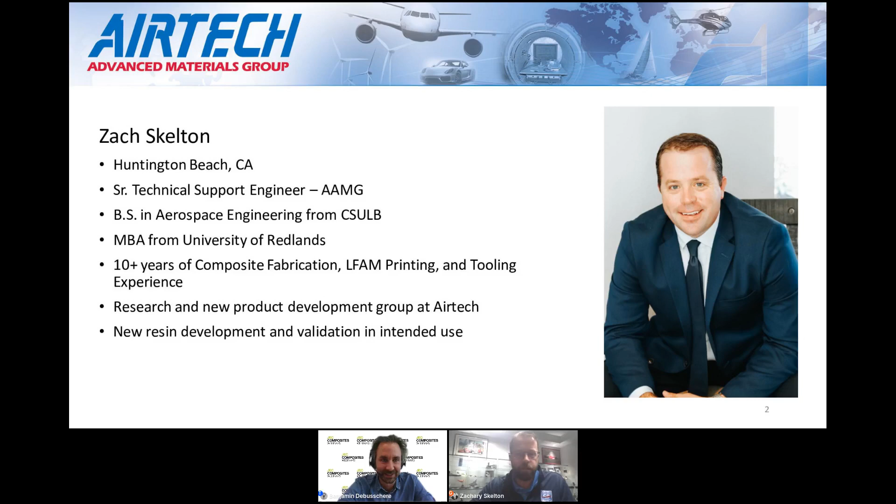You can go, Zach. It still shows loading on my screen here. Can we see the presentation? You don't see it? No, not yet. Let me reshare it. There we go, okay, perfect.

As Benjamin noted, we are going to be talking about how Airtech is validating our tooling materials for specific applications.

Just a little overview. Benjamin already gave a great overview of Airtech, but we wanted to specifically talk about our large format resin development, the steps we take along the way from compounding, printing, mechanical screening, as well as multi-platform validation and working with OEMs for end-use applications. We'll also take some time to talk about the elimination of barriers to production use, the functional testing we're performing, use cases and success stories, and a bit of the ongoing development and projects we're working on at the moment.

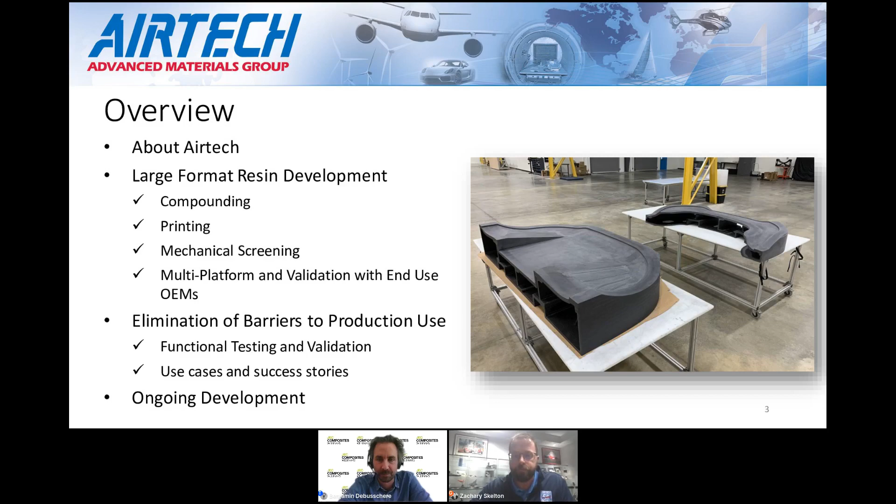A little bit about Airtech, really just leveraging our experience. Most of the folks at Airtech came from production environments, composite fabrication history, as well as a lot of historical tooling applications. Leveraging over 50 or nearly 50 years of compounding and extrusion experience, and really just taking 3D printing, which is essentially an extruder up on a gantry, we're leveraging that experience, as well as selecting material specifically knowing the end application.

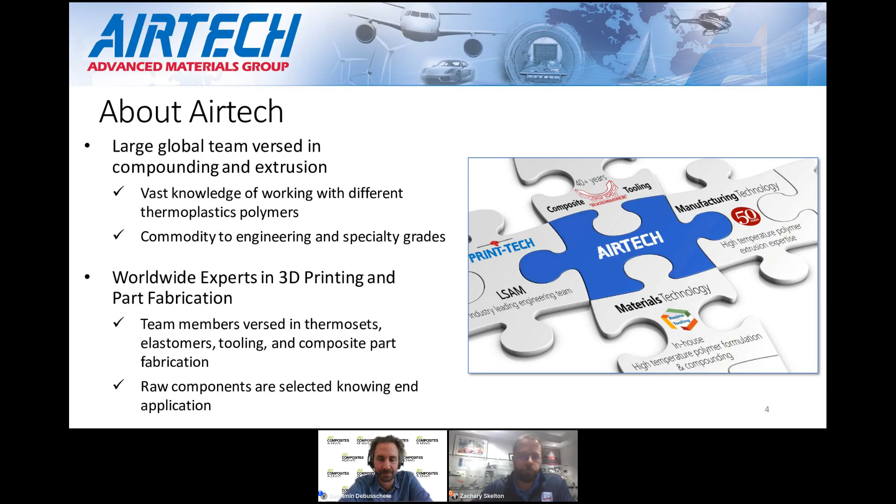So we do have two locations, one in Luxembourg, which is close to probably most of the folks on this call, but also in Springfield, Tennessee, which is just outside of Nashville. Identical machines, identical footprint, identical team members and capabilities.

So in both locations, we have two Thermwood LSAMs, which are 40 feet by 10 feet by 5 feet build envelopes. Both gantries can cover the complete envelope of the machine. So high deposition rates, we can extrude up to 500 pounds an hour. Tools get built extremely quickly, but then post-printing, we can come back and machine to aerospace levels of finish and quality.

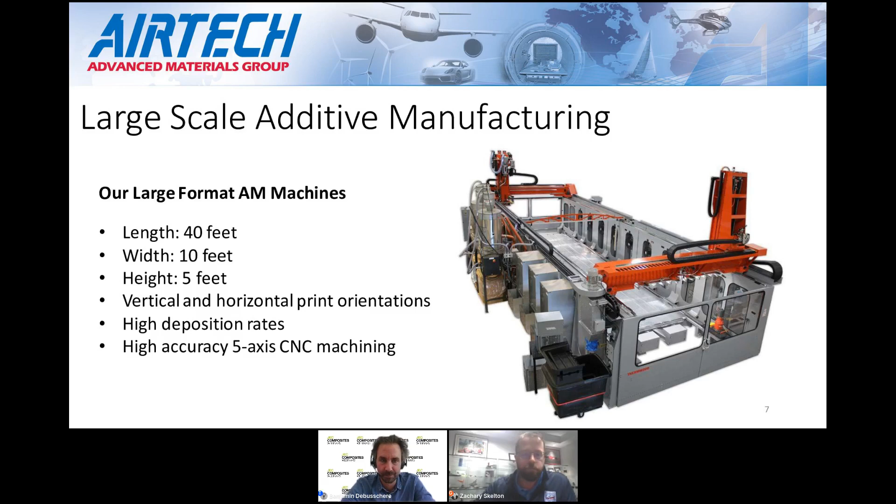Just a brief overview of the steps we go through while validating tools or materials for tooling applications. Everything starts with compounding, and then we'll move on to print trials. Post-print trials, we'll perform some mechanical screening, tweak things if needed, but then start scaling things up, look at in-depth lab analysis, as well as printing articles for the intended use. And then we'll start working with other machine manufacturers, validating the materials work on their machines, and continuing to work with customers through fabrication.

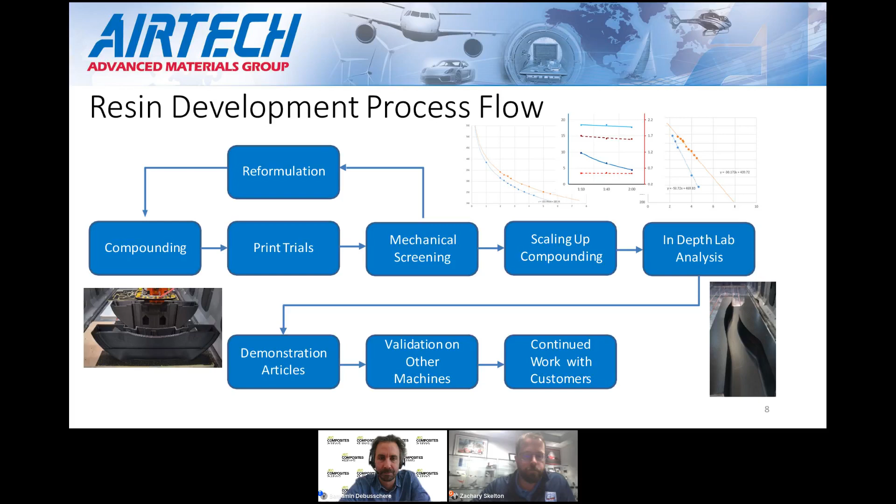So compounding is kind of where it all starts, right? As I mentioned, Airtech's been compounding and extruding now for 50 years and over 40 years of experience with various other different tooling materials and applications. So really raw materials are selected knowing the intended use. And the goal is to develop resins that are capable of meeting the expectations and really just drive the technology forward, right? We want to make sure that the materials can keep pace with the development of the industry as a whole, and push things forward.

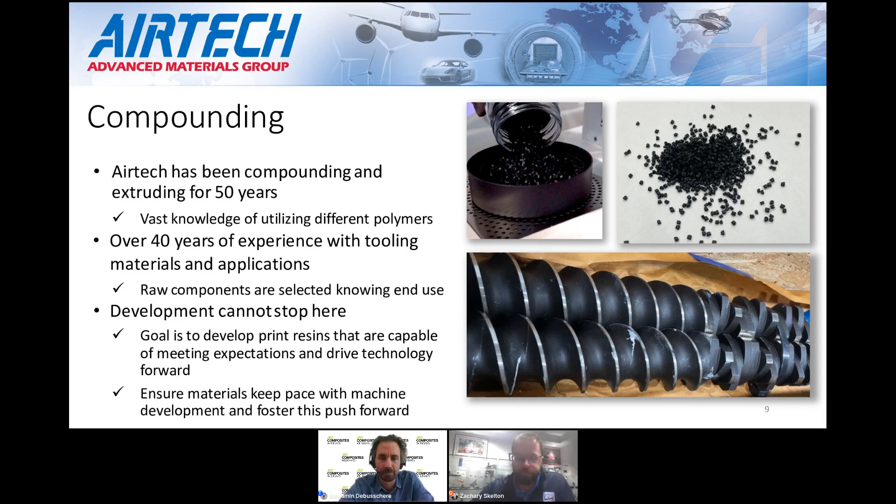So after compounding, we come to print trials. We're going to really just leverage the knowledge of what makes things printable, but evaluate everything through the process. So looking at essentially layer times, looking at the thermal properties, warp, start stops, how those are tuned and tweaked, make sure that it's really meeting our expectations, but also looking at things like step over, printing at angles, bridging, those kinds of things, but really ensure that we are meeting the expectations for the intended use.

To date, we have printed and characterized over 350 different resin formulations, and frankly, we're not sitting on our hands either. There's probably another 50 to 70 that are in the pipeline here.

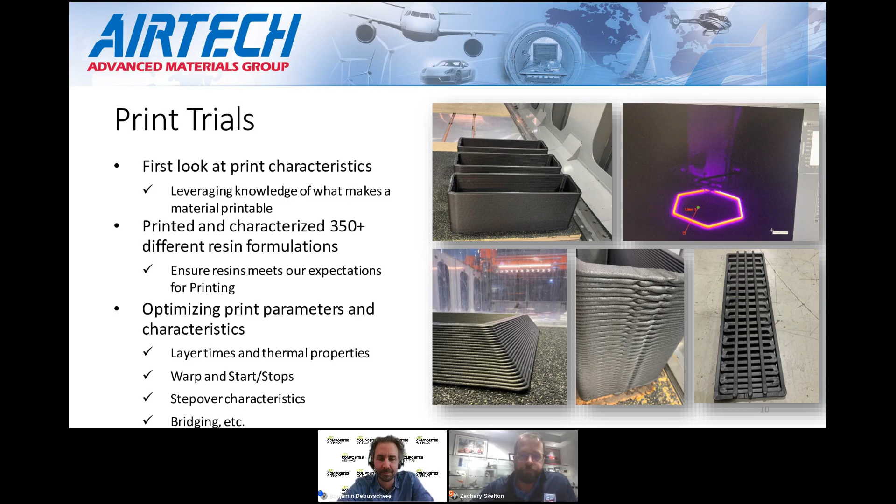So post-print trials, we'll look at mechanical screening. Really everything is done with the intent of as printed, right? So you can see several of the coupons there. But this is not injection molding. In reality, the injection molding properties really don't do anybody any favors. We're going to start looking at things like tensile strength and modulus, elongation at break, flexural strength modulus, CTE, as well as glass transition temperature. Again, just making sure that it is meeting the expectations.

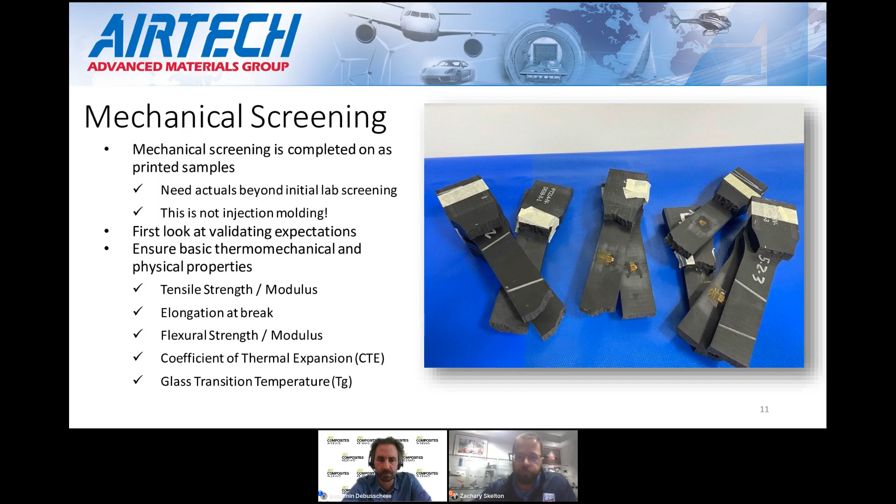Post-initial screening, we'll start looking at larger batches. Obviously, we want to make sure that things are scalable, but then we'll also start producing material enough for a complete mechanical analysis, as well as printing demonstration articles and testing them in the intended use.

So in general, a lot of the compounding will happen here in Huntington Beach. It then gets transferred to Tennessee, where I work very closely with the team members there. Tools get printed, they come back to Huntington Beach. We have ovens, autoclaves, all the bagging materials that we would need, and we'll start validating them in use.

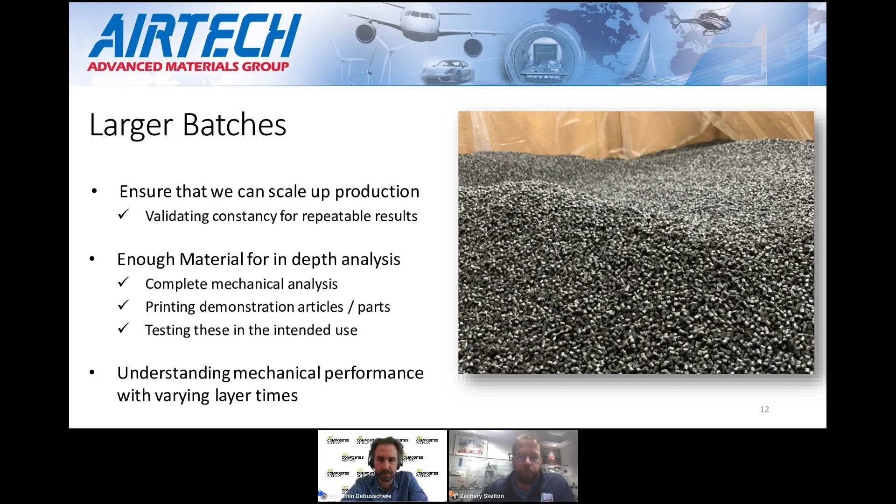So post the scaling up of compounding, we'll start looking at a more in-depth analysis, right? This is all third-party testing. It's all data that's available for spec qualification with our customers. But we're looking at all failure modes, and the idea at this point is really to understand the mechanical properties as a function of time.

So with 3D printing, there's kind of this Goldilocks zone where things are not too hot, where they can still remain stable, but then you also want to deposit material back in a timely fashion so that you get good mechanical properties. So really the drive here is to enable stress analysis as a function of layer time. We can take the slice geometry, look at what the deposition time is going to be, and perform a stress analysis prior to printing.

But in conjunction to that, we'll also start doing contact material testing. We have an extensive database of materials that we've validated to date. That includes solvents and cleaners, sealer and release agents, as well as production and tooling resin systems. You can see just a little sample of it there. In general, good, bad, and ugly, we're happy to test it. Sometimes you get surprised. There's a broad database that is living and growing every day as we work with customers. And frankly, if we haven't tried it, we're happy to try it. We have plenty of flat panels here in Huntington Beach or in Luxembourg, as well as in the UK. Autoclaves are available, so happy to test any resin systems if we haven't.

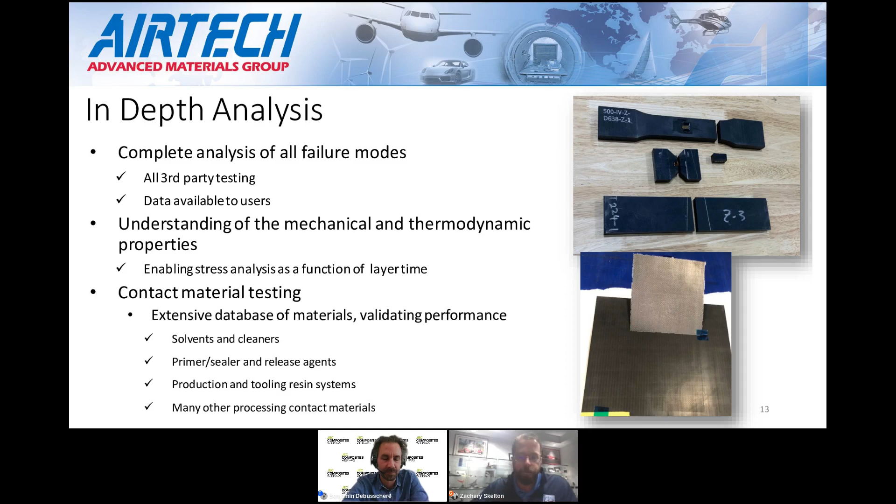Also look at printing demonstration articles, as well as the actual cycle test tool - we'll cover more of that in a minute. In general, no secondary surface coatings are needed. The tools get printed, machined, and then are vacuum tight and autoclave capable. All of our materials are post machining. We've also done extensive work with annealing trials and validation, looking at long-term use of the tools in a production type environment - long-term autoclave cycling, dimensional analysis, vacuum integrity, as well as fabricating parts off of the mold in conjunction with that cycle testing.

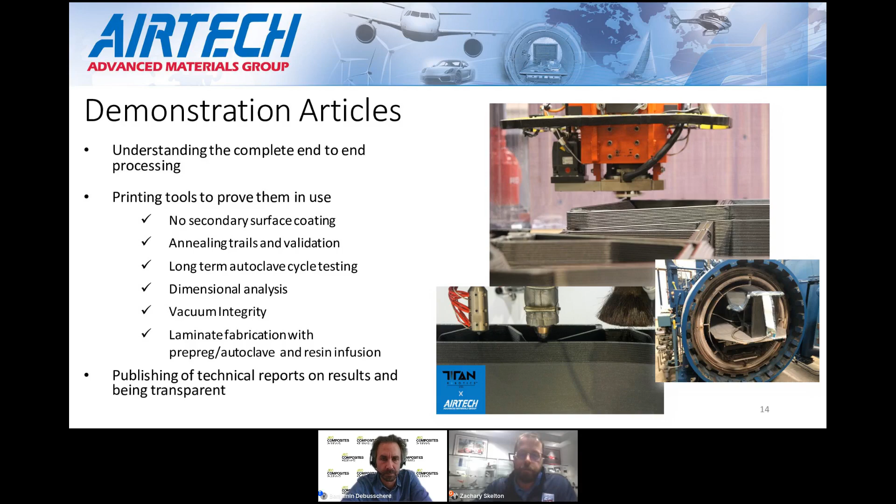As I said, we're working with all machine manufacturers, and I'll cover that more as we go through - but at least these are the folks I can be transparent about. We're working with a lot of machine manufacturers that are in development. The intent in working with other machine manufacturers is validating that our expectations can be met on their machine, showing that the mechanical data we publish can be achieved there as well. We'll also help with extrusion, validating the mechanics, third party, and being transparent about those results.

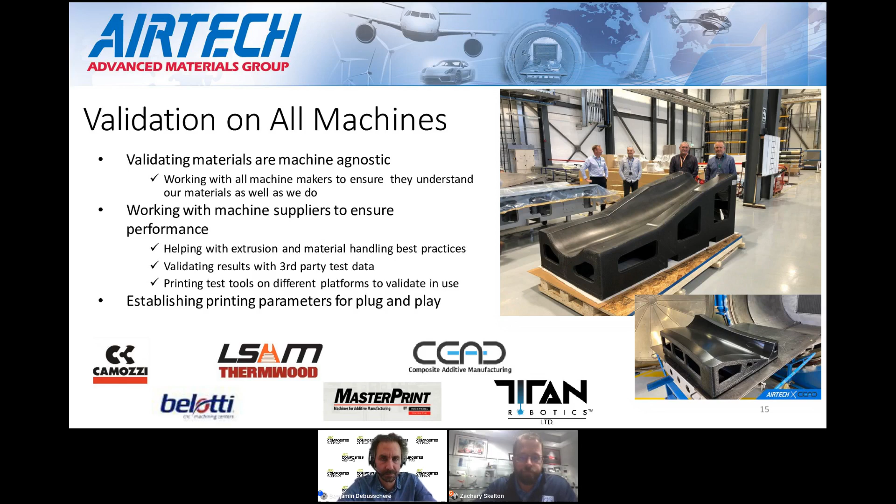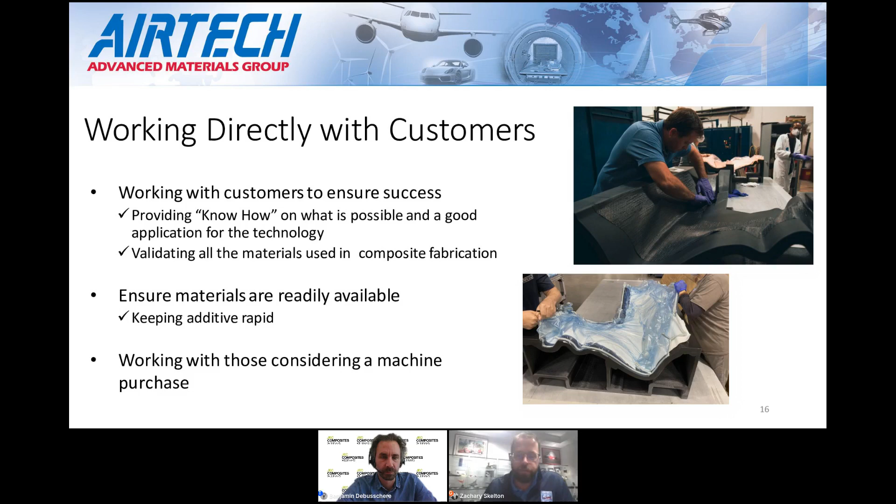We'll also look at printing test tools - you can see an example of a tool made on one of the CEAD platforms, as well as the Master Print system from Ingersoll. We'll also work directly with customers, even using the tools, everything from the bagging materials, the sealant tape, those kinds of things. We also keep an ample inventory of materials, both in the US and in Europe - the idea is keeping additive rapid. We're happy to work with those considering a machine purchase all through the process. Frankly, we want everybody to buy a 3D printing machine.

A little bit about the barriers we're working to overcome in the production process - what are those? Lack of mechanical data on current materials. It's quite common to see materials that are made but not tested and validated. We want to prove those in use, show some history, and help customers understand how to overcome some of the anisotropic properties of the materials. There are also misconceptions about material toughness, what accuracy can be achieved, as well as showing we can meet the thermal requirements for spec use.

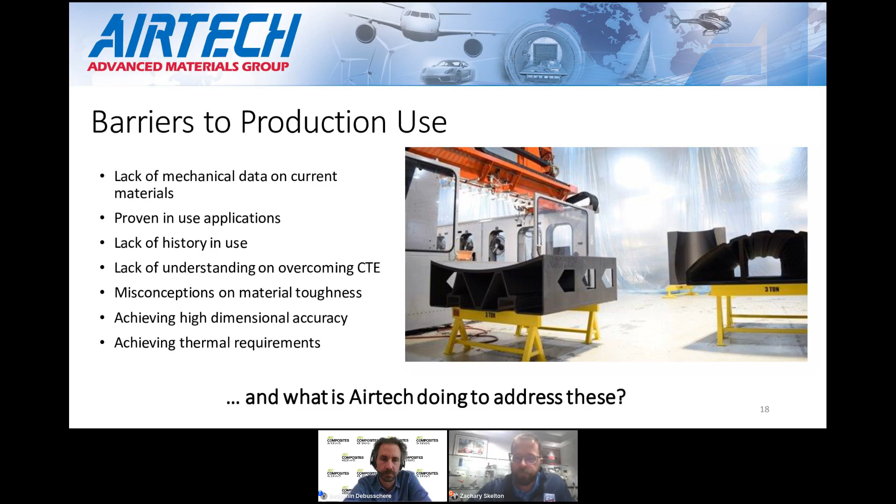It all starts with the mechanical and functional testing. This is not injection molding - we really need properties that are as-printed. Why is that needed? Larger tools, the bigger you get, especially things that start going overhead, we really need to perform a stress analysis, making sure the tools being produced are safe for the end-use customers. And then third-party test analysis, making that data available for qualification.

We've done a significant amount of work with the national labs here in the US, as well as in Europe, validating the as-printed performance - making sure our materials are machine agnostic, that we can work on any print platform. Then understanding how those Z mechanics change as a function of layer time. Typically the bead stacking will drop off as you push the layer times longer and longer, while the X values remain fairly consistent. As you print larger and larger, sometimes you don't have a choice, and you need to understand if the tool will meet the intended use as we push that layer time longer.

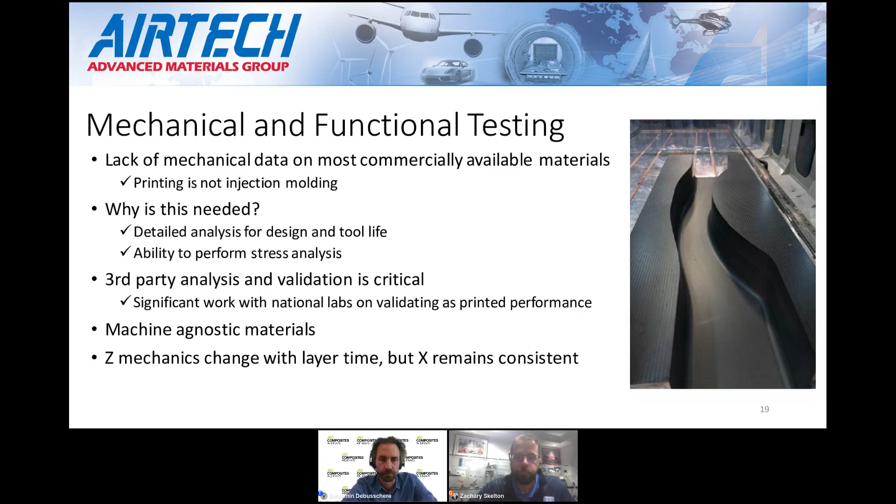So again, proving them out in use - you can see the cycle test tool that's there. We are past 350 autoclave cycles now, not seeing any signs of failure, and again no secondary sealing is needed for that vacuum integrity. We do expect it to go past 500 cycles. We're continuing to cycle that and pull laminates, and then publish those results.

We can also achieve a very nice surface finish, depending on requirements - these are all done prior to any seal and release application. You can see a 16 micro-inch finish there, very close to a Class A automotive surface. We've continued to run additional trials with polishing to see how good of a surface we can achieve, but Class A surfaces are achievable for automotive applications.

Zach, I have a quick question on this specific slide - what about the hardness of this material? How do they compare to pre-preg or metallic tooling?

There's a common misconception in the industry that thermoplastics are soft and not rigid. In reality, we're getting very close to the hardness of aluminum, especially as we move up into the higher temp polymers, similar to thermoplastics used in aerospace part applications. But the resin matrix itself is much harder than, say, a traditional thermoset. So the tools are much more robust than most people give them credit for.

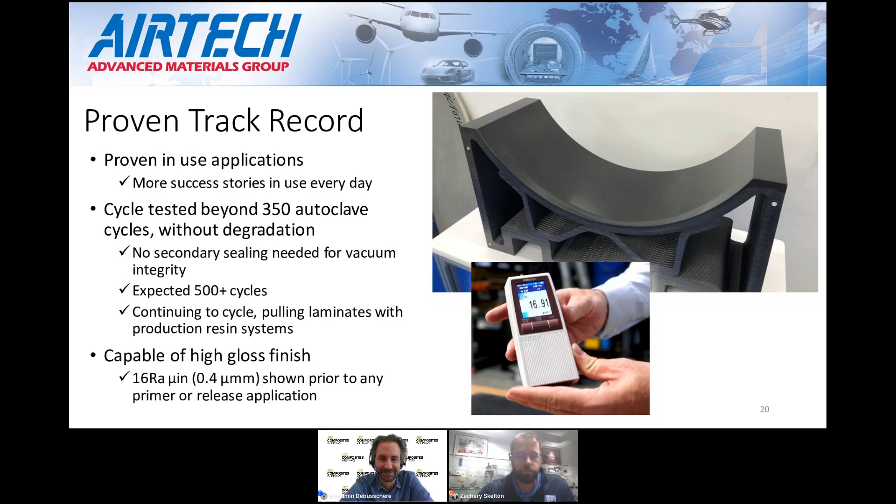This was off of the cycle test tool, post 250 cycles. We are still evaluating it at 350. I can tell you right now the data is identical, but this is just the data post 250.

This is the raw autoclave data, 100 PSI, 355F, so 180C and 7 bar. You can see the raw autoclave data — vacuum probe 1 dropped about 0.2 inches of mercury, or about 7 millibar. Vacuum probe 2 fluctuated, we'll call it zero. But again, vacuum is shut off at temperature and pressure.

So very well within any specs for vacuum integrity. But we also performed a fiberglass leak check. For folks not familiar with it, it's kind of the gold standard in tooling for knowing where a leak is. That 0.2 inches of mercury drop, that 7 millibar, if that was in the tool face, would be problematic. But you have potential sources like bagging ears, through bag connections, couplings to hoses, couplings to the autoclave — all of those can leak a little bit. So this helps us understand the tool surface itself is solid.

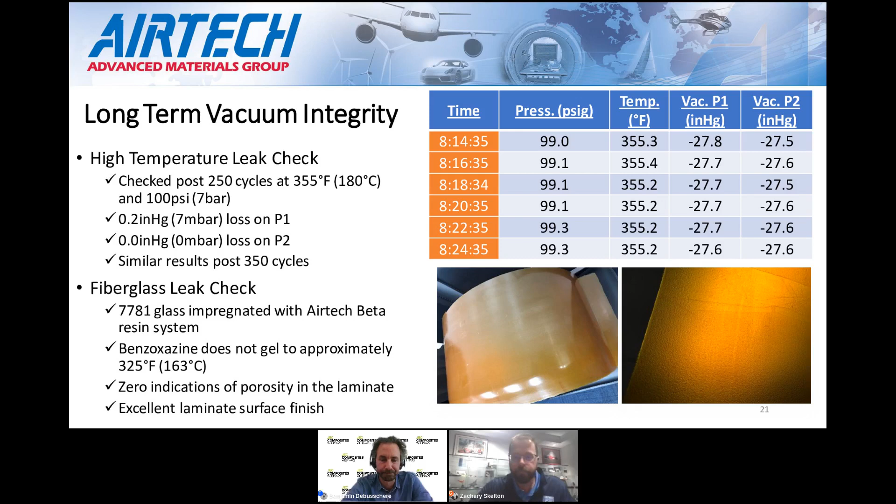Again, looking at the long-term dimensional stability, we do have a very detailed test report that we can provide to customers — feel free to reach out if you'd like to see it. This was an overlay post-cycle testing to the original scan data, showing no surface deviations greater than 0.005 of an inch. You can see the overlay there.

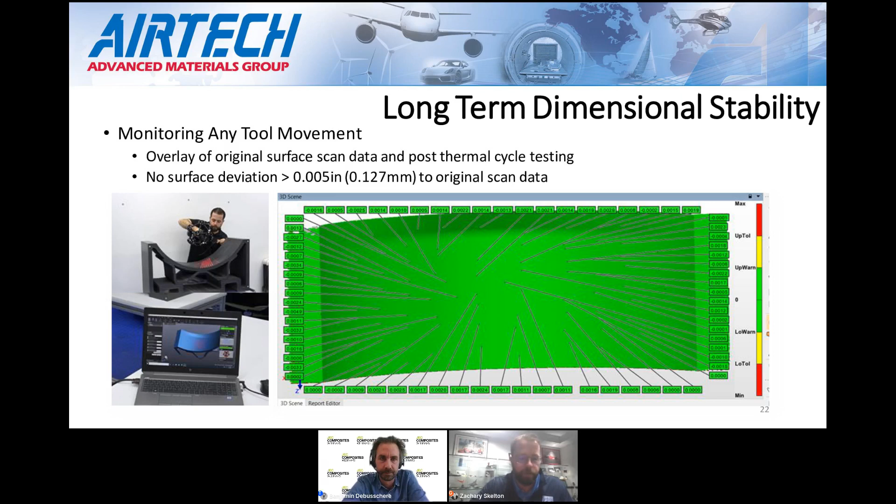Again, looking at that surface integrity — like I said, there are some misconceptions on the material toughness, but we've been pulling laminates from that tool, you can see a couple examples there, benzoxazine and an epoxy down at the bottom. We've tested everything we have in our inventory with no issues, but we've also been pulling production resin systems off of tools just to show they will work. That includes BMIs, epoxies, cyanate esters, in autoclave and out-of-autoclave applications. If we haven't tested it, we're more than happy to go test it. You can see an example of the gloss that can be achieved coming off of the molds.

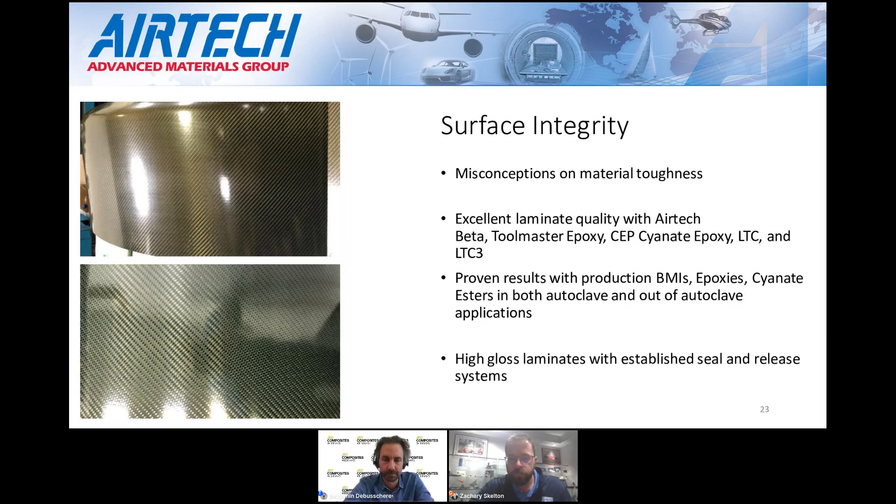Just a visual of the tool after cycle testing — you can see there's really no visible deterioration, damage, or oxidation. We're currently evaluating the 350 cycles at our California and Tennessee locations, again trying to share that information.

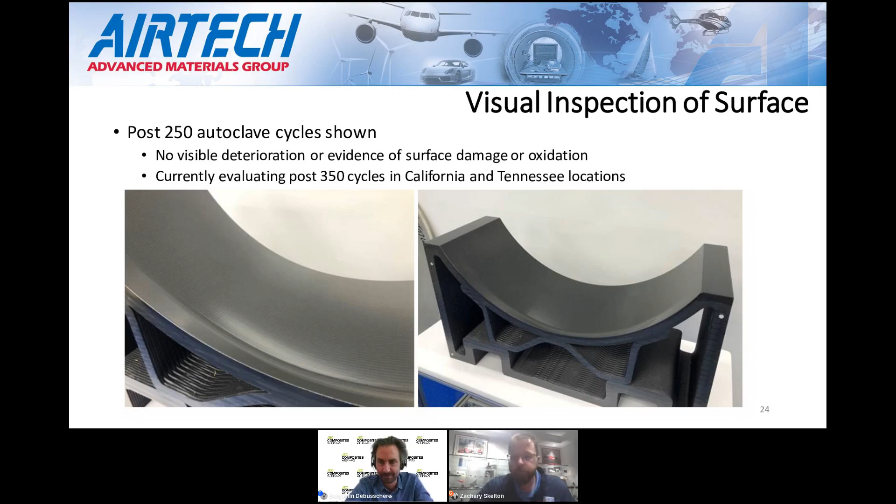Under the microscope, you can see an example of the tool surface. We're not really seeing any evidence of micro cracking or surface degradation. In traditional thermoset systems, the failure mode is typically that micro cracking, which leads to delaminations, and ultimately to loss of vacuum integrity. But here we're really seeing no evidence of it whatsoever.

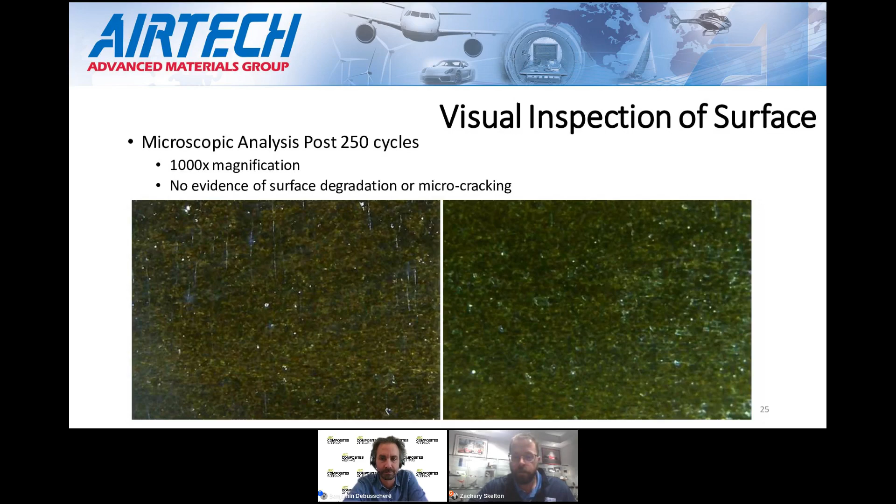Not all things are printable, so understanding where it's a good fit and where it's not - we're more than willing to help customers understand that, work through that. In general, we will take a surface, compensate it based on the orientation it's going to be printed in, and make sure that the tool will be in the right place during cure. And then, frankly, being transparent if things are not a great fit for the application. So it's not a solution for everything, but when it has a place, it's a great solution.

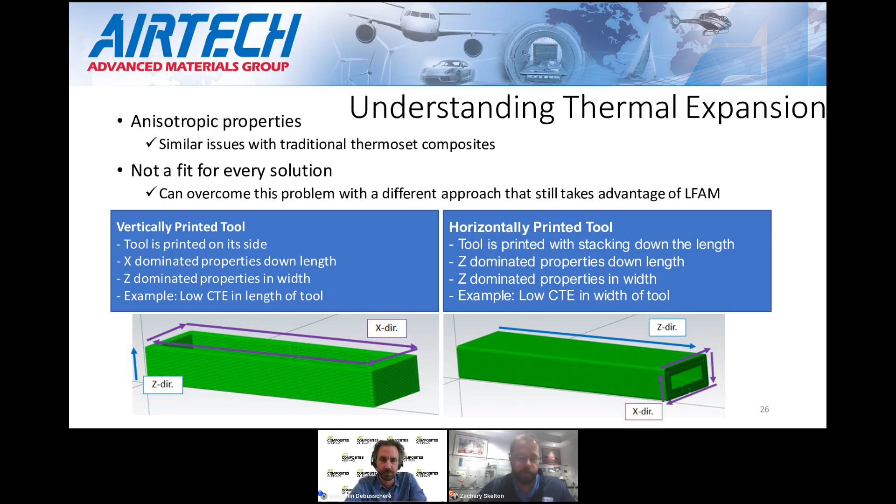We can set details in post machining. We've seen proven results with masters, layup molds, preform tools, holding fixtures - you name it. Even in metal forming applications, we're seeing some great strides.

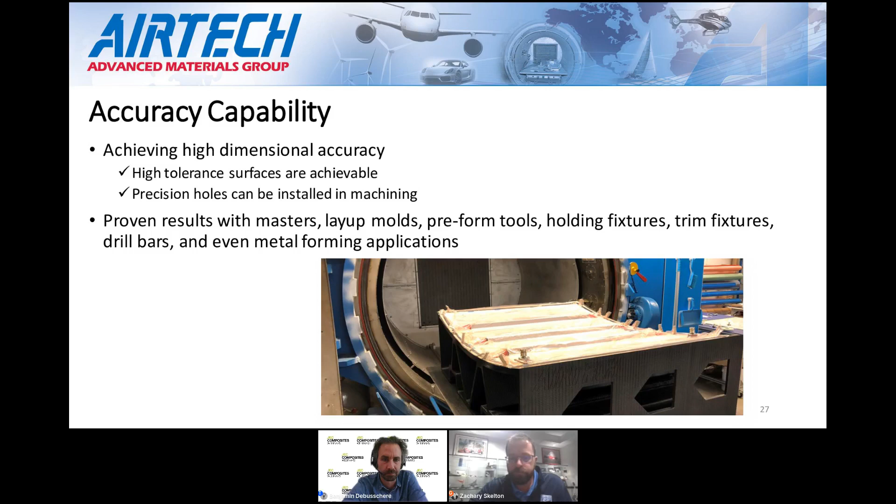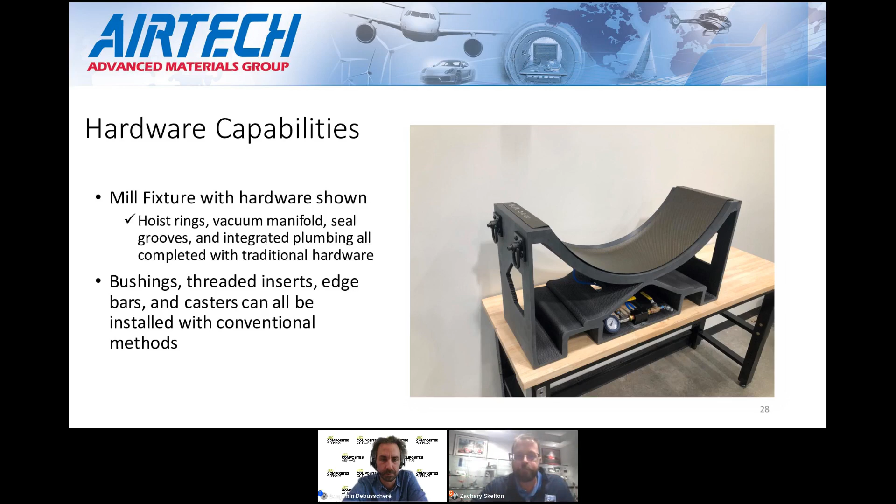Also looking at the consumables - we do have a brochure available of all the materials we've tested, and then our recommended materials to use for the given application. So everything from the low temp applications all the way up to high temp.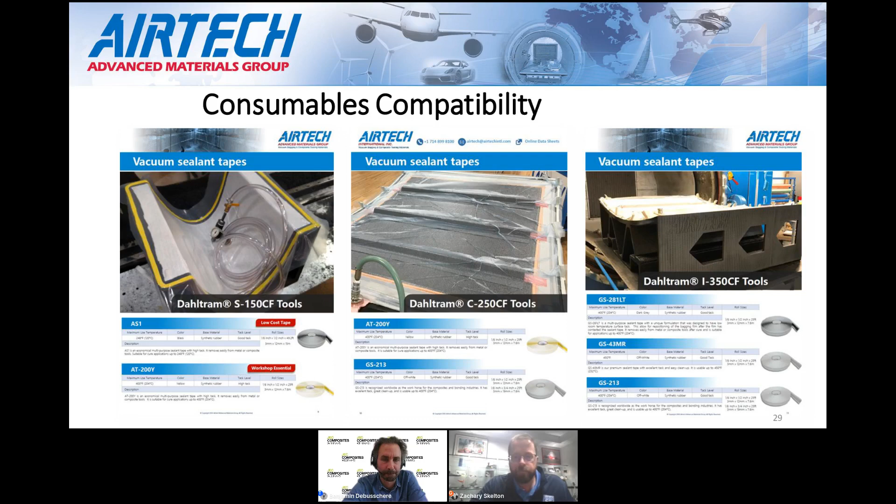We've also done a considerable amount of work on how to design tools to achieve the thermal performance required. In general, the backup structure, everything, is printed in situ with the tool face sheet being printed. So printing in things like large windows and then limiting thermal mass - limiting contact with the face sheet, allowing for good airflow.

Given that it's 3D printing, things that are achievable with traditional processes but really cost prohibitive - we can do things like print in contoured headers or grow a header to only contact where it's needed. Again, minimizing the heat sinks, allowing for good airflow.

And in that process, we've seen vastly improved thermal cycles compared to things like epoxy or urethane foams. In general, they kind of fall between a metal tool and a composite tool in their thermal performance - quite good performance in general, allowing for really good cycle times through the autoclave.

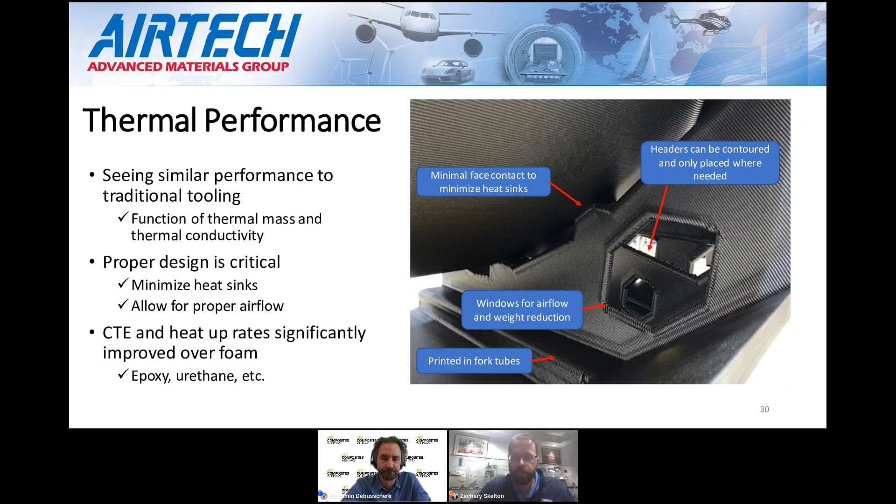So just in general, kind of a summary - the development process really should not end after compounding and basic mechanicals, showing that things will work in use. Frankly, different applications require diverse offerings, but showing that the properties are predictable and that we can validate them for the process of production tooling.

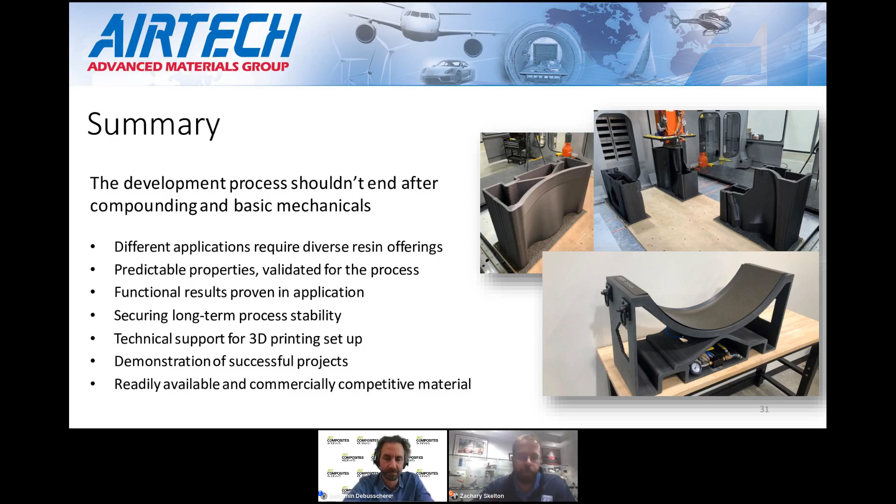So really showing the results proven in application, being transparent about those, and then securing long-term process stability, as well as technical support for the 3D printing, helping those that are looking to set up, and sharing a demonstration of successful projects. And again, all materials are readily available in inventory and commercially competitive.

So just wanted to share a few examples here, as well as a brief overview of the tooling process. It's very similar steps to traditional tooling. Printing is the primary step - really the magic is all in the printing. After that, it's business as usual.

The only real difference in the process flow is that in a traditional tooling approach, you have some float time with the NC programming. The printing happens so fast that you really need to be NC programming from day one, because in general, when we hit go and print, the next day we're machining. So you really don't have much float time there for the NC programming.

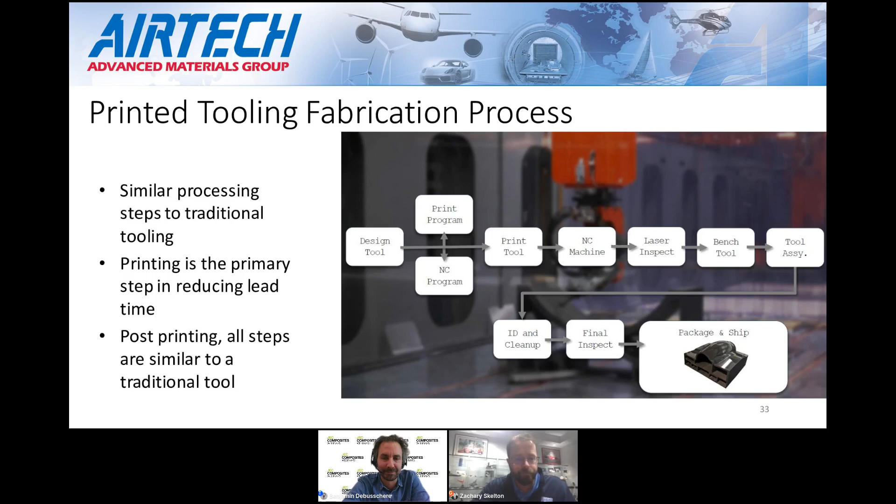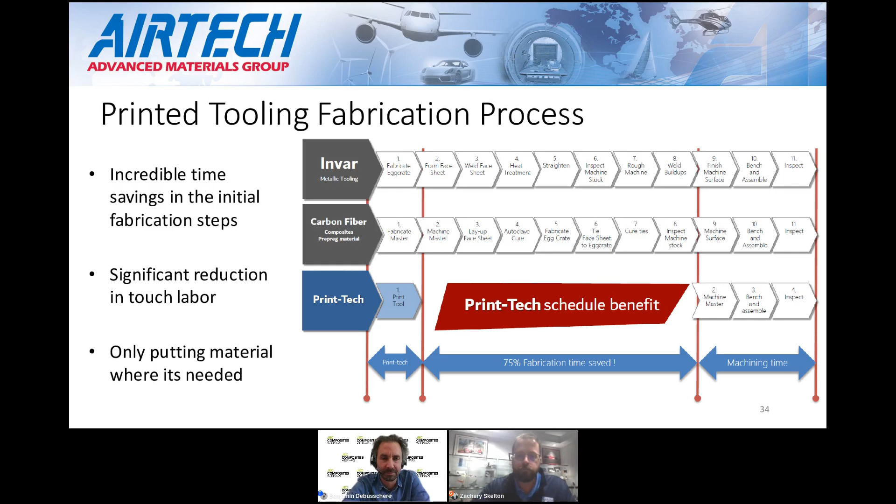Compared to the traditional process, we're seeing a vastly reduced lead time—a 75, even 80% reduction. Most of that happens on the front end, with a significant reduction in touch labor and fabrication needed to get to 5-axis machining with traditional tooling processes. We're also only putting material where it's needed.

Just some examples. Our primary focus has been in the aerospace tooling market, so trying to share what I can—being aerospace, that doesn't happen too often. This was a spar mold we did for an aerospace customer, 350 cure, 100 PSI, just to give an idea of what's possible. It was roughly 2.5 meters long, 1 meter wide, printed in 7.5 hours, but the tool was designed, built, and finished in 3 weeks—quite a rapid process.

That also led to successful adoption of 3D printed tools at the customer. We've since printed quite a few larger components for them, up to about 3 meters by 3 meters by 1.5 meters—quite large tools for layup mold applications.

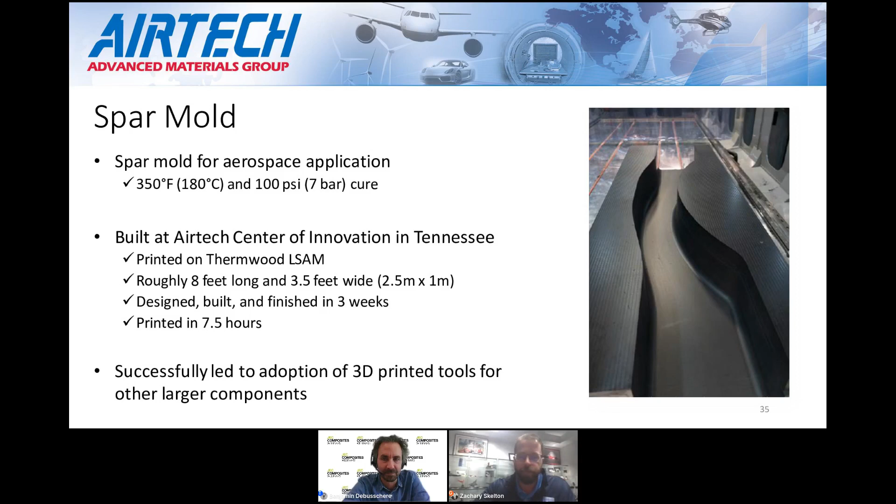This is an example of a joint venture we did with Ingersoll and their master print system, as well as Camozzi in Italy. The part was ultimately fabricated by Plyform Composites—it's a helicopter door mold, actually a multi-piece tool. It was standing on display at JEC, so the mandrels weren't in there, but you can see the part. That was 180C and 7 bar, a 3-piece mold design.

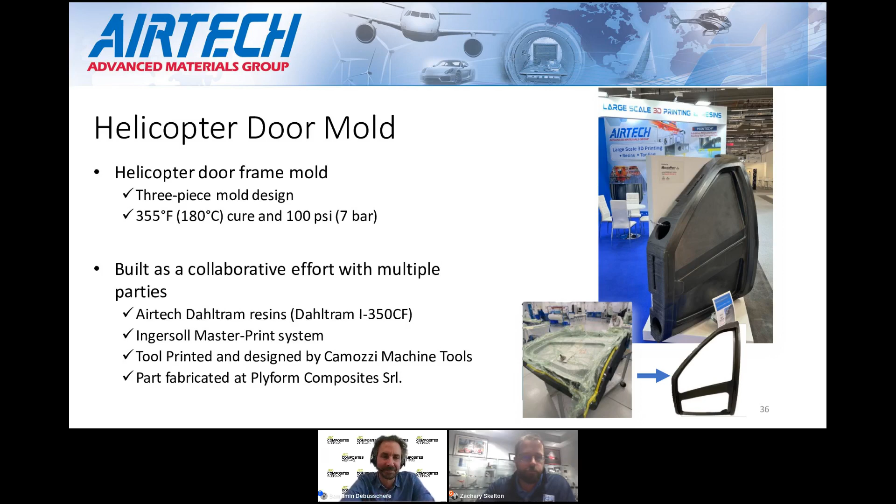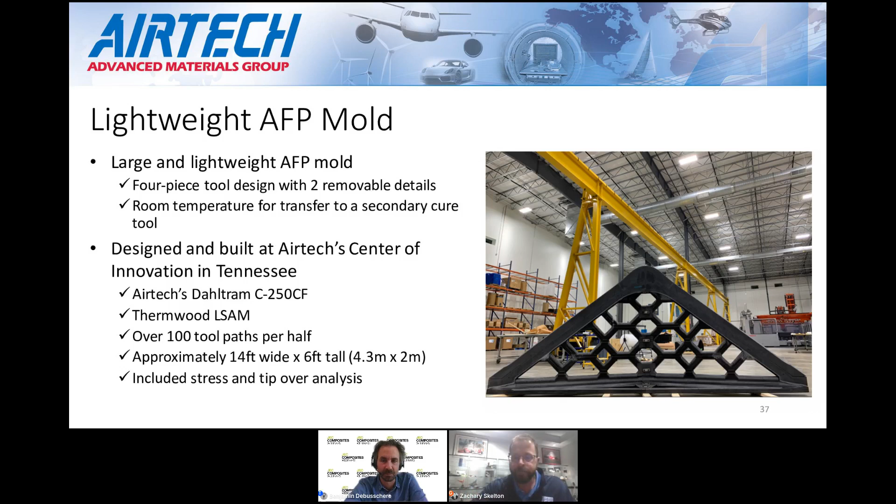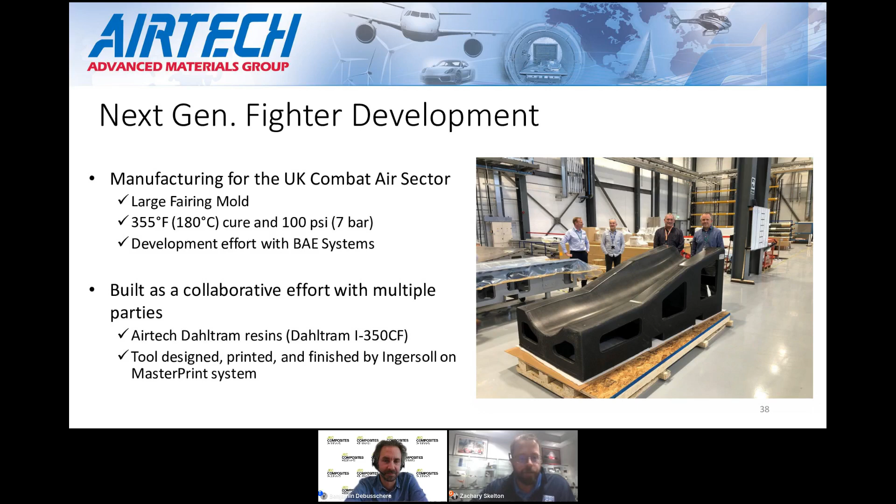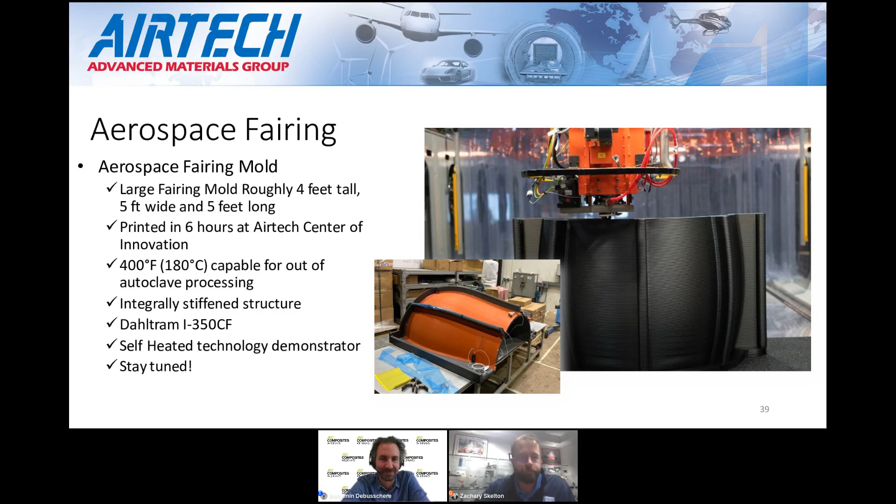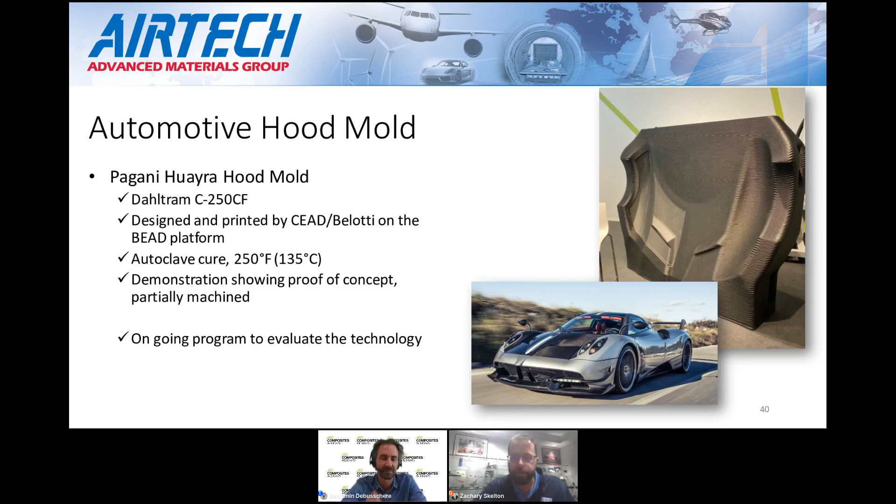I do have a little short video we can share right after this—we produced some molds for a local company in Huntington Beach, California, BBI Racing. This was our Dahltram C-250CF, out-of-autoclave pre-preg application. We printed 6 tools, with multiple tools printed at the same time so you can leverage economies of scale with a large machine. In general, we'll nest tools and print multiples when we can, to help reduce the cost. Those 6 tools were designed, printed, and delivered in under 4 weeks, and all of the parts were completed by week 6.

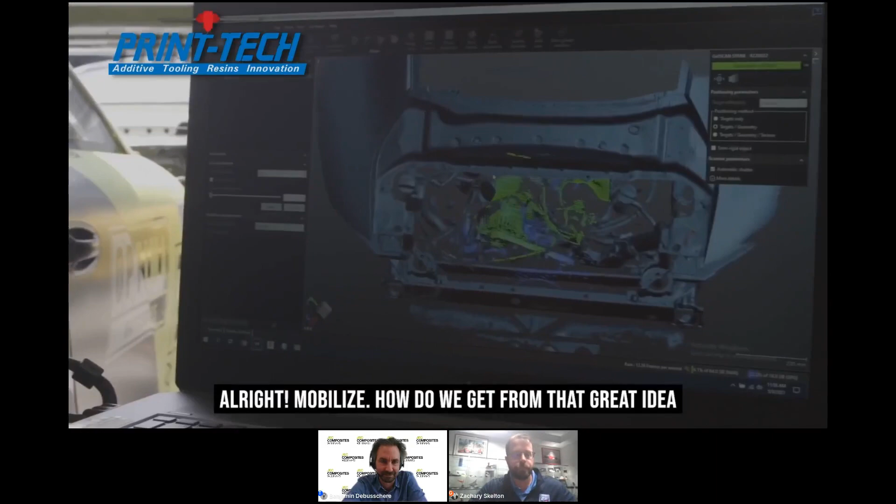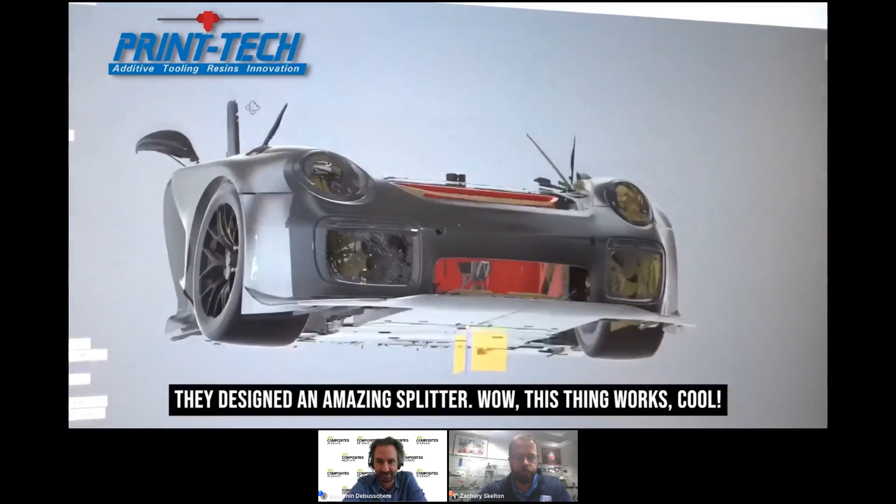Good ideas die in the valley. Everybody goes through the benefits, I don't care who you are, we're seeing it. Great idea, conceptually works, all right, mobilize. How do we then get from that great idea to manufacturing it to an end result? It doesn't matter if you're starting a business, it doesn't matter, there's always these complexities. They design an amazing splitter, wow this thing works, cool, how do we build it? Well there's 36 pieces to it.

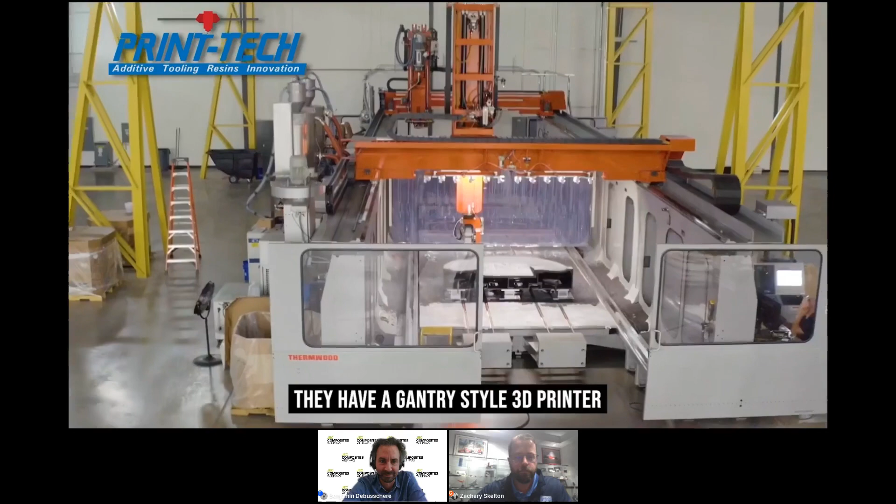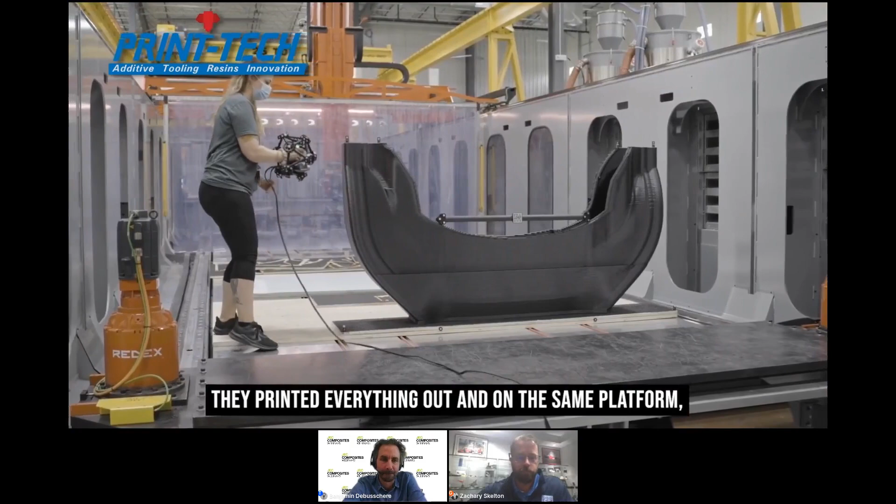Okay, so are we 3D printing parts of it? And then how do we lay up the carbons? Now we got to buy material, we have to make a mold. Well then, Dimitri reached out to Airtech. They 3D printed our molds. They have a gantry style 3D printer with a printing envelope that's 10 feet tall, 10 feet wide by 40 feet long. They printed everything out, and on the same platform, tool change comes in and remachines all the surfaces. And then it cures, and then they re-CMM it, using Creaform components that ScanHub does also.

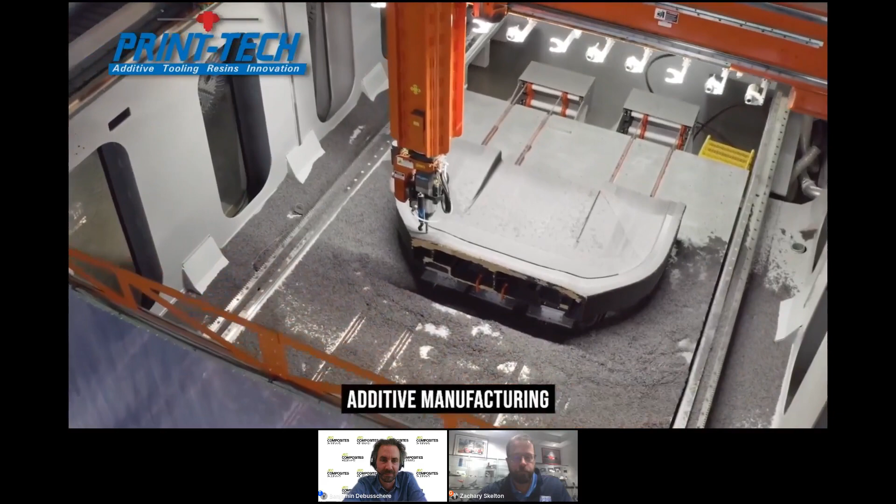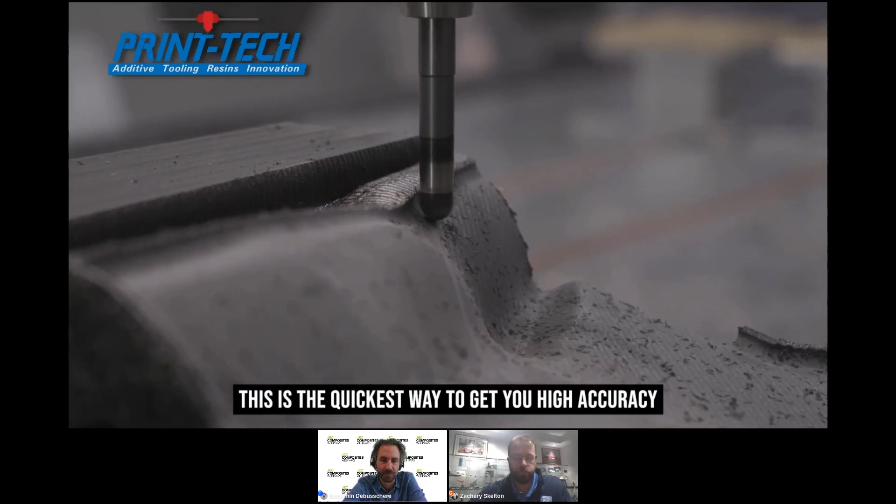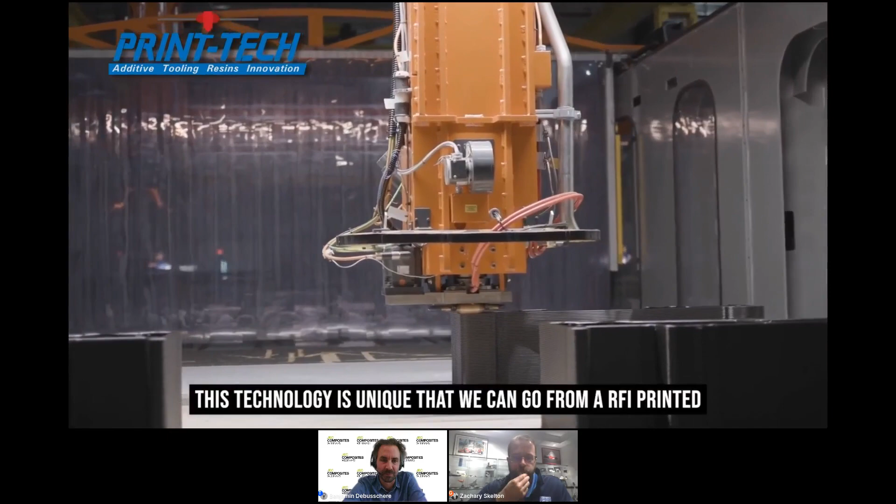So my name is Gregory Hay, and I'm the Director of Additive Manufacturing for Airtech International. Today we're here in our facility in Springfield, Tennessee. This is our new Center of Excellence for large-scale additive manufacturing, or 3D printing. So this is where we offer services and also resins for large-scale printing of tooling for composites. We serve all markets globally, both here and out of our facility in Luxembourg. This is really the quickest way we can get you high accuracy, high performing tooling without the wait time and without excessive cost. This technology is unique in that we can go from a printed near net shape to a finished mold in a very short amount of time.

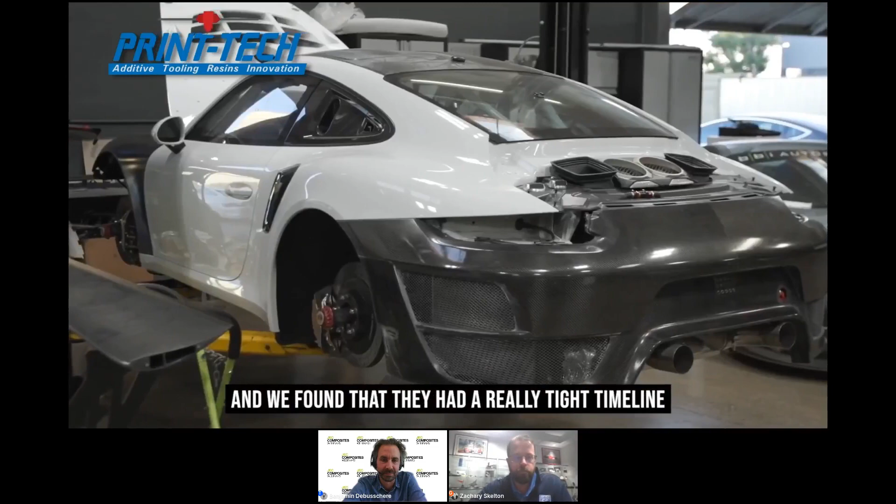And so this is where BBI became interested in our technology, and we found that they had a really tight timeline, identified a need where we could put a tool in their hands faster than any other technology, but also be able to do it at aerospace levels of quality and finish.

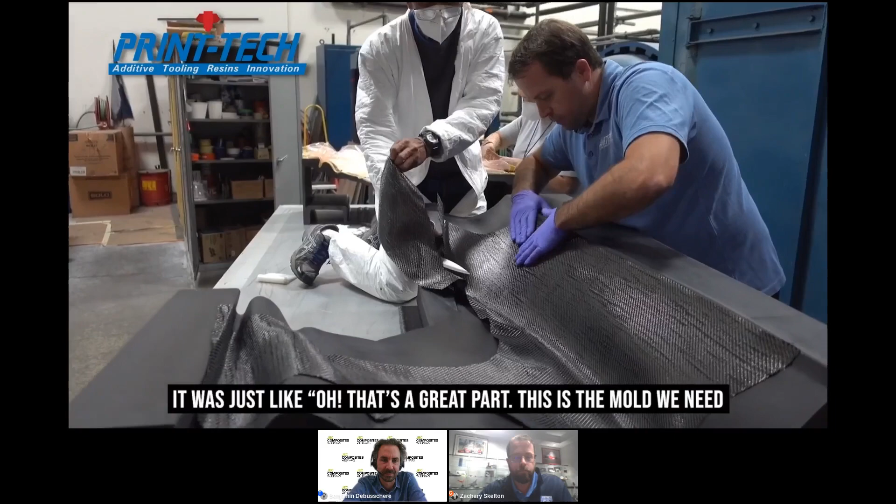Airtech shrunk that valley of death to almost nothing. It really just came down to, oh that's a great part, this is the mold we need to make for it, and we're going to print it and cut it and ship it to you and just start laying up the carbon. That was insane. They're just an awesome family-run business that has been instrumental to us being able to get out of that valley. It's a combined effort with a lot of people, and all of a sudden things start to happen. You start achieving all the things you think you can achieve. You can't do it on your own.

You are mute, Zach. Yeah.

So yeah, one of the great benefits is we jumped through all those hurdles. It was quite crazy, but at the end they ended up winning. So all things were worth it.

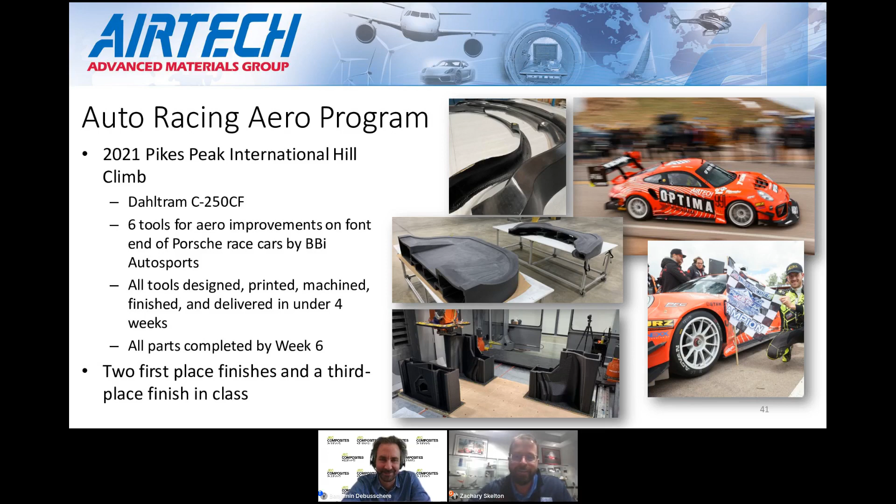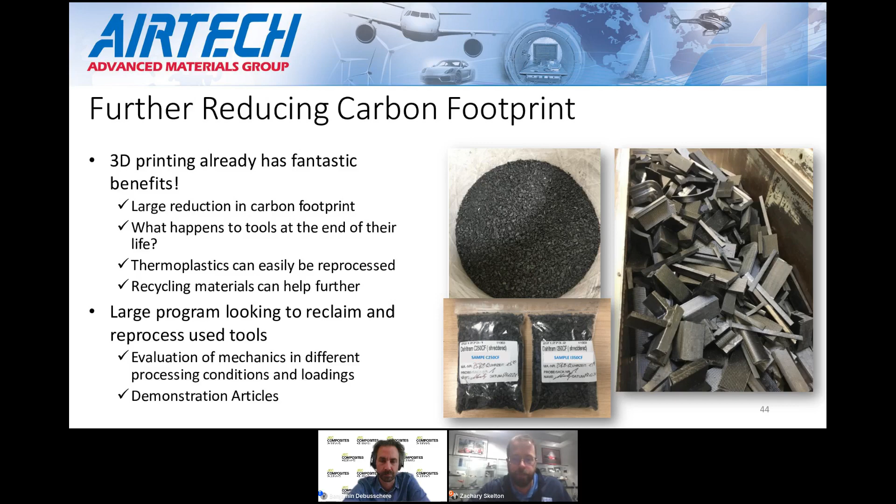But also expanding into new applications, we've even performed some metal forming applications. We've seen some really great benefits to the strength of the materials. In general they're much tougher than some of the higher density urethane or cast urethane type systems. So seeing some great benefits there.